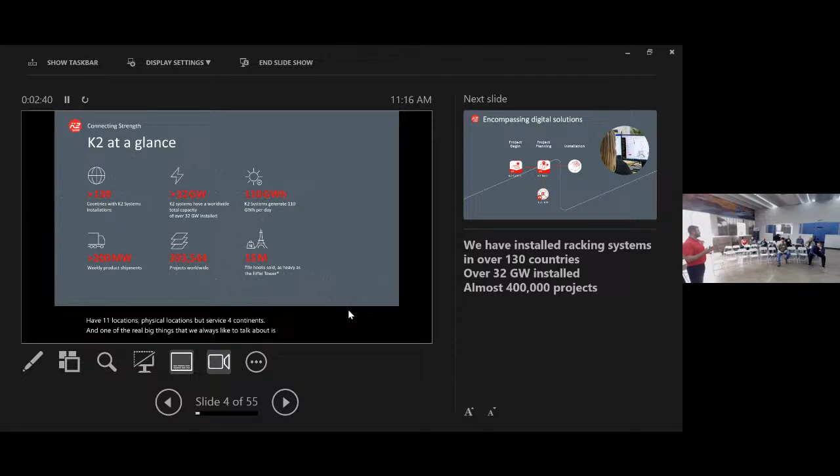One of the things we like to highlight with K2 Systems is that we are a global manufacturer. We currently have 11 physical locations, but service 4 continents. One of the big things we like to talk about is we actively provide material to 130 countries and have just under 400,000 projects worldwide.

One of the really great tools we offer is a design tool called K2 Quote and K2 Base. Those that start to use us will have access to this. These provide a bunch of engineering background and embedded service to it, a great tool to offer the installer community.

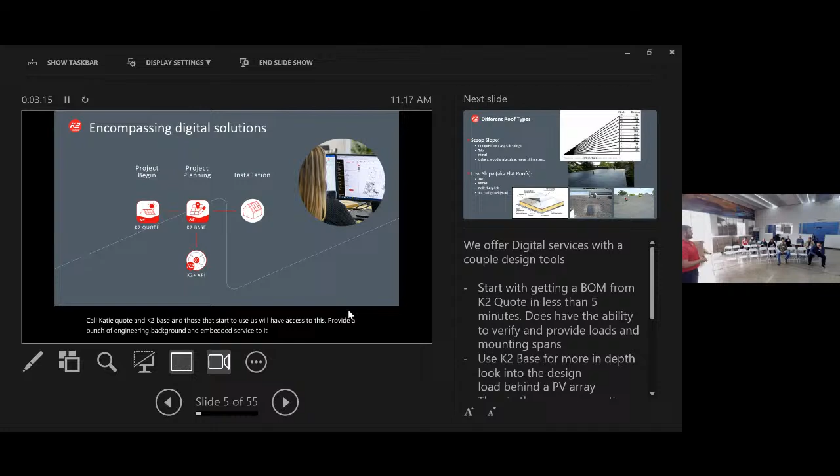All right, let's get into it. As was said, I've been an installer for 8 years before coming to K2, as a foreman on commercial crews, so I've seen a lot of the challenges we're going to talk about in today's presentation. We want to open the floor for you guys too, so ask what type of challenges you're seeing, and if any questions arise feel free to interrupt. We'll make this conversational.

What is a low slope roof or flat roof? We're going to focus on commercial flat roofs. I've been involved in some ground mounts as well, but today's focus is on the challenges in the flat roof space and solutions we can offer. A low slope, or flat roof, is anything below a 2:12 pitch. In roofing terms, 2:12 is 2 inches of rise over 12 inches of run, which ends up being a 9.5 degree tilt. So anything 9.5 degrees and lower is what we're focusing on today, and anything higher would be considered a pitched or steep slope roof.

Let's go through the evolution of racking, where it comes from. Some of the early adoption of solar in the 70s and 80s was all custom built frames, sometimes wood racking, heavy steel material, just unistrut available at the electrical supply house. There was no testing or certification involved, it was all custom.

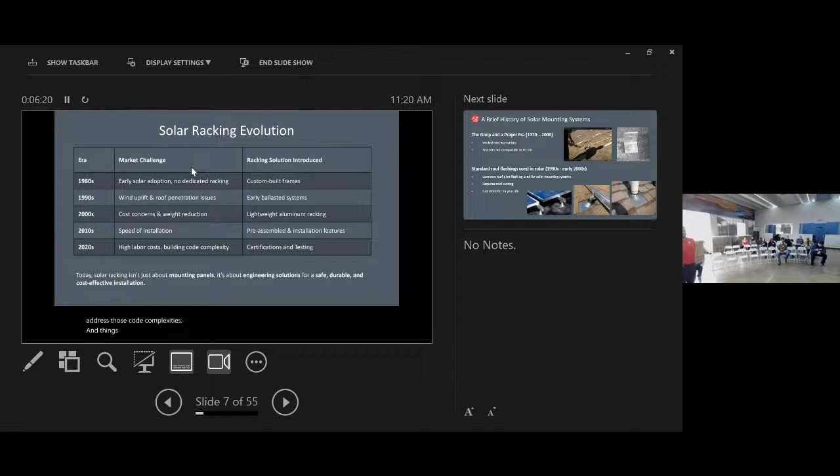So like I said in the beginning, it was all custom racking. We call it the 'Goop and a Prayer' era, where you can see in these images just wood blocks sealed to the roof with whatever caulking they had on site, not roofing-approved sealants, just whatever they had, and angle brackets attached directly down onto the rooftop with some sealant on top.

Moving forward, now we have some code around flashings in the IBC and the IRC. So installers are starting to use metal flashings, but still no real solar-specific design components. They were just using roof boots, whatever you'd use on site for drainage pipes or vent pipes. Good enough.

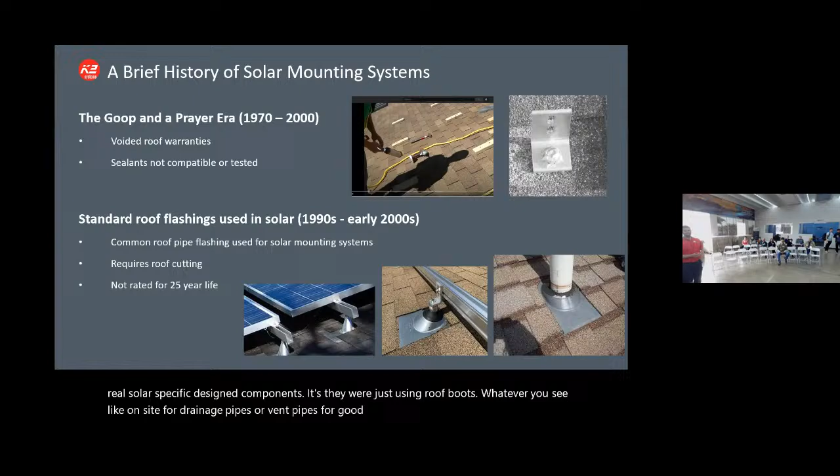Continuing forward, now we're in the early 2000s, 2010s. Now we actually do have solar-specific flashings, not just using the OD flashing you'd see for roof vents. These are now addressing building code compliance, and AHJs and finance companies are starting to deny anything that's not using these solar-specific components.

Then moving forward into the 2020s, we have direct-to-deck options, rafter options using what we like to call flexible flashing. So no more reliance on the metal flashings. It's no more prying up of shingles, which eliminates a lot of that user error and installation error, and really keeps the integrity of the roof intact versus having to pry up tar strips of shingles.

And now we're seeing butyl-based designs with pre-assembled butyl bottoms and similar approaches.

We sell and provide hardware in most of our components. This one will come kitted with a number 14 screw. We decided to go with the number 14 screws as our primary option, but we do offer lag bolts as well, so if you still want to do the pre-drilled pilot hole with the 5/16 lag bolts, that's fine too.

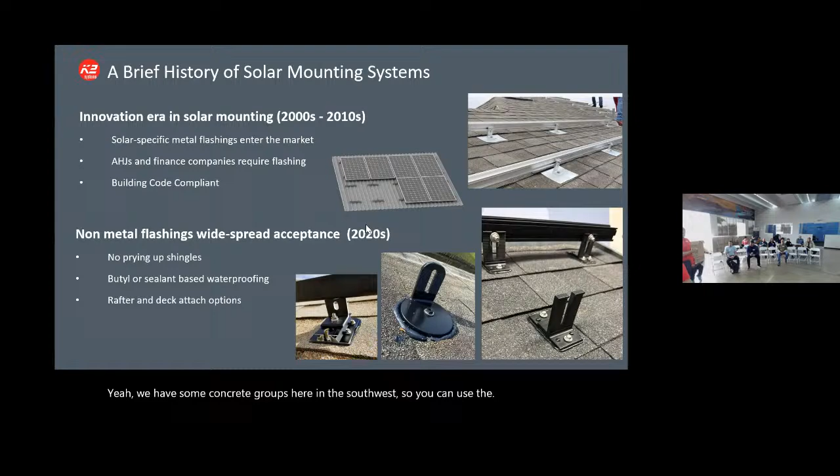Okay, yeah, and this is what we just talked about. So one of the things that we did is decided to go back and use a butyl product that is UL 2703 compliant. UL 2703 being, you know, mounting and clamping systems for solar PV, and this variant of that addresses waterproofing and runs through various testing and is now UL 2703 compliant. We also have an ICC report on this butyl as well. So if you're not familiar, the International Code Council is the one writing the IBC, the IRC, which originally had in these different codes that metal flashings were the compliant way to deal with rooftop waterproofing. So ICC is now recognizing flexible flashing as a compliant option.

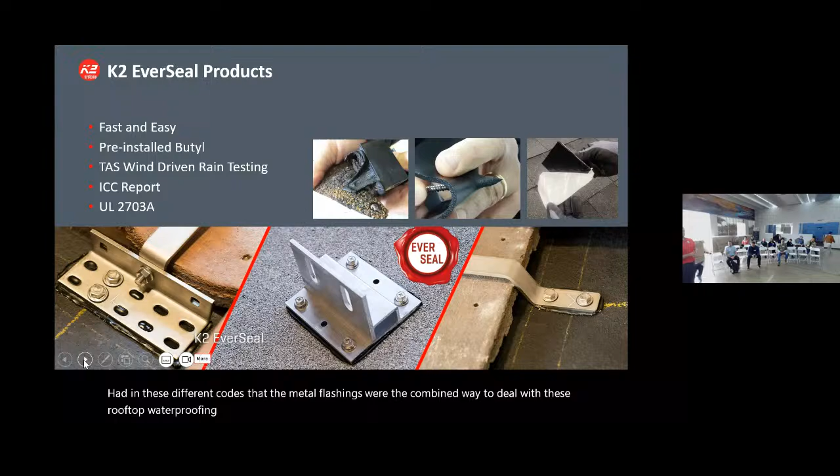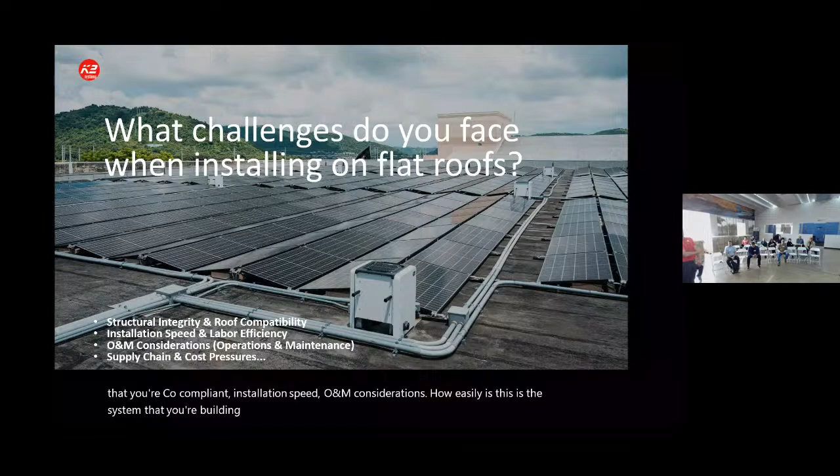So some of the challenges that we see with racking and logistics are structural integrity, roof compatibility, finding the right products, making sure that you're code compliant, installation speed, O&M considerations, how easily a system you're building is maintainable, and supply chain and cost pressures, right? Having universal components, less amount of materials in-house, but still being able to find the right solution.

So we wanted to ask you guys in the crowd here, what challenges are you guys seeing in this flat roof space?

The typical one would be like obstructions, maximizing either the power density or just building around different roof obstructions and the space that you have to work with. And if somebody's on a flat roof, there's going to be a lot of big HVAC systems or piping systems on the rooftop that you have to work around. Another one, with those large systems on the rooftops, is the load that you can actually put on these roofs. How much PSF can the rooftop take? Point load as well. But structurally, if that's capable or not.

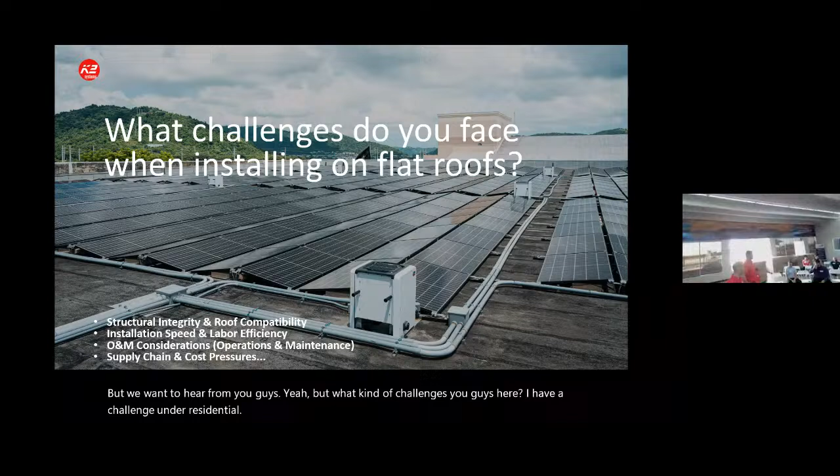Okay, yeah, so there's a couple different systems. You could use a ballasted system and get beneath 8 pounds per square foot for sure. Sometimes it's a little bit tricky depending on the region, the wind load you're seeing. But also, we'll talk about this a little bit, there's a mechanically attached system where you're actually fastening into the roof structure through the foam too, even in some cases. So we're probably talking about mechanically attached if we're talking about foam on top that you're worried about.

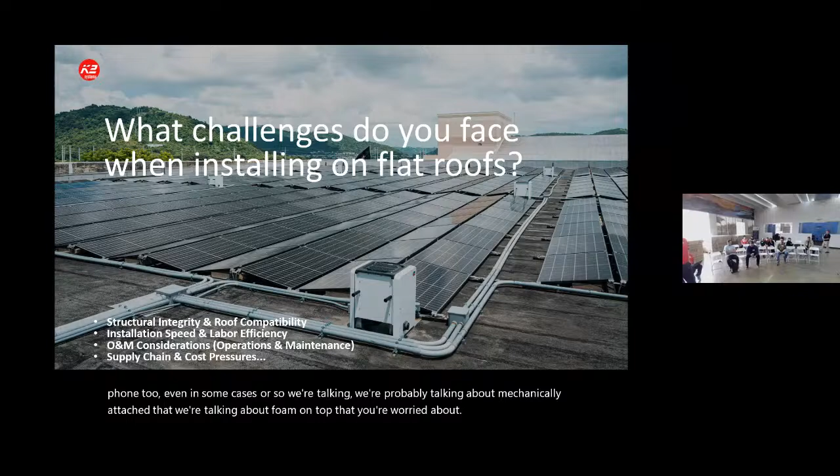Like we're doing our pound per square foot, we want to know how many ballast blocks, how it's distributed. Typically you can get beneath that 8, even with a ballasted system, with our ballast-based system that we'll talk about. But the other option is always to go with a mechanically attached system and tilt it up, because on a flat roof you could go flush mount, but you'd want to tilt that up.

You guys are using the kind of install customers are asking specifically to put on the roof, right? Yeah. That's a challenge with that, staying underneath that 8 pounds per square foot.

Yeah, I think that should be doable, right? It's even 5 or so. Difficult, yeah, but on average it'll be between 5 and 7, so we can get beneath that 8. We can talk about it and figure out a couple of applications.

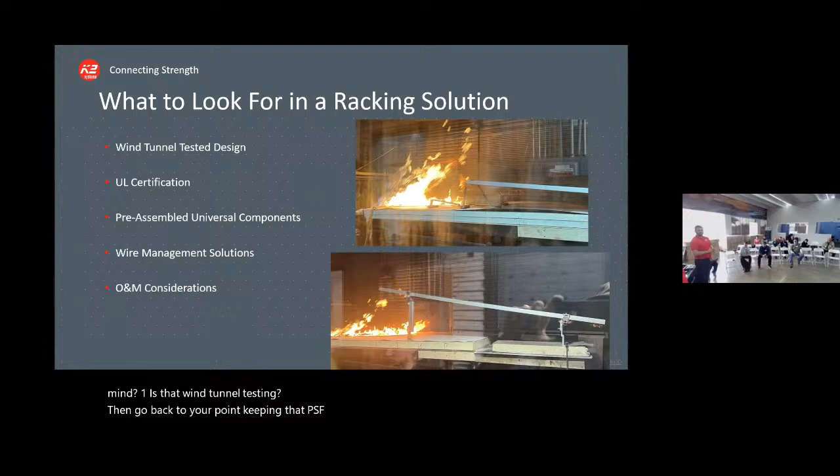So what are we looking for in a racking solution? What are the things to keep in mind? One is wind tunnel testing. Again, going back to keeping that PSF down, is your system optimized for wind tunnel testing so you don't need a certain amount of ballast blocks on the roof that would bring you over that 8 pounds?

UL certification is another one. Here are a couple of images of some of the testing you go through with UL certifications, UL 2703 specifically. Basically throwing flames at the roof, you simulate a rooftop and put your racking system on there, and see does the racking system contribute in any way to the spread of that flame. That's basically what they're going for, and happy to say that ours does not.

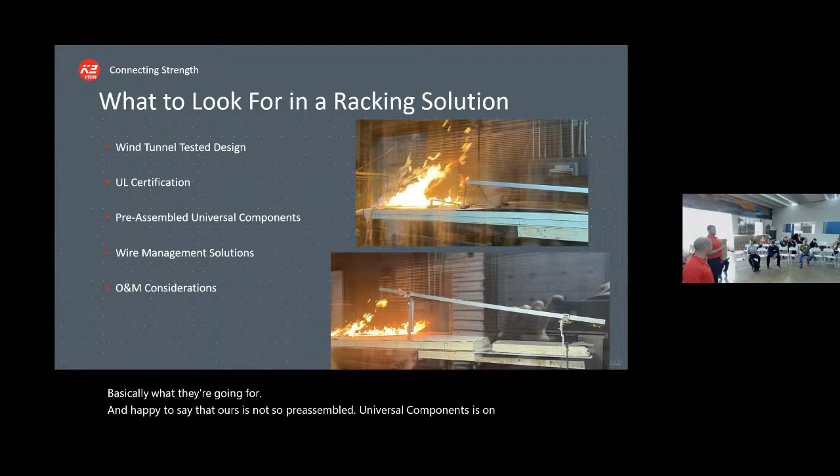Pre-assembled universal components help on the installation, labor side, and cost. And then wire management solutions - we're talking solar here, so there's going to be electricity, PV wire, module leads, optimizer and microinverter leads that you have to deal with. You don't want those things getting damaged or dangling on the roof. You want a certain height off the rooftop for heat concerns, and then O&M considerations - how easy can you maintain the system?

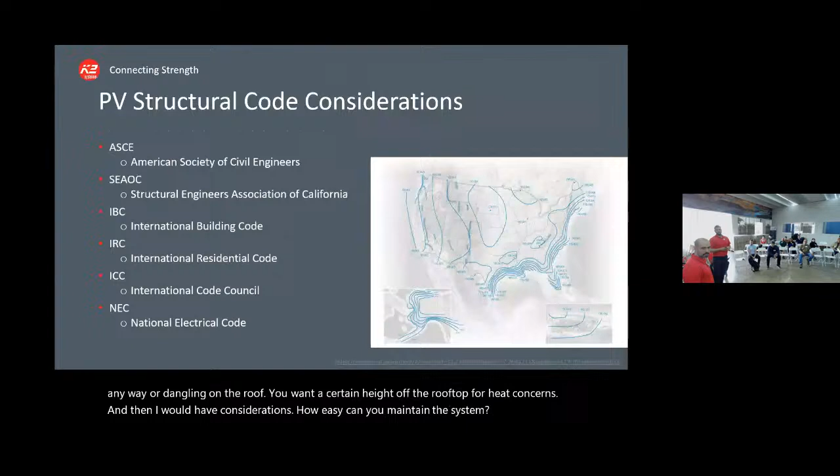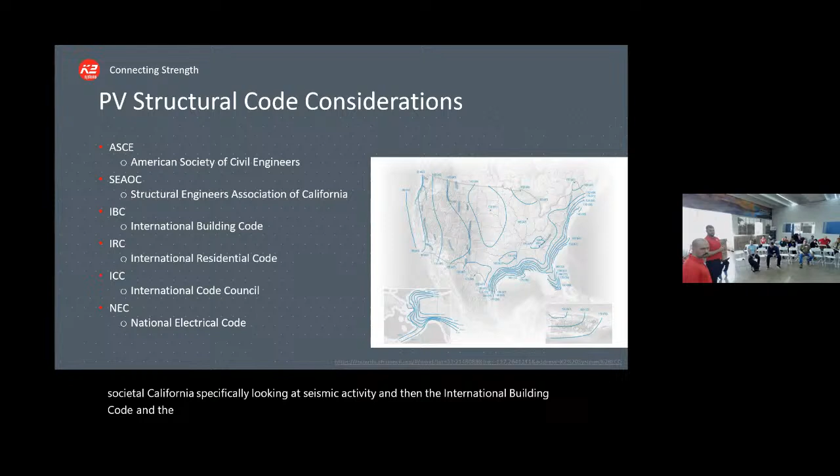There's some structural code to keep in mind when designing a system and choosing a racking partner. The American Society of Civil Engineers, ASCE 7 in particular - their section addresses wind and snow loads, seismic loads. SEAOC, Structural Engineers Association of California, specifically looks at seismic activity. Then the International Building Code and International Residential Code address flashing concerns on rooftops, written by the ICC, and then the National Electrical Code, specifically 690, the PV systems code, looking at rapid shutdown.

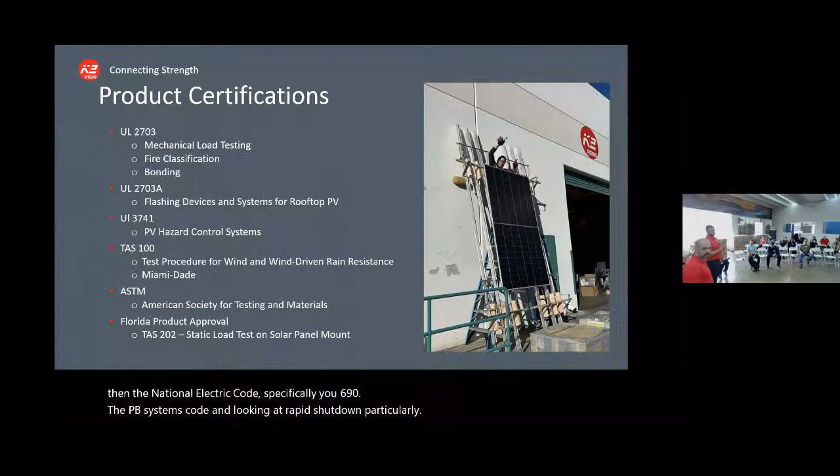Product certifications are another thing to find in a racking partner - UL 2703. Are they certified to one or two of these classifications - mechanical, fire, bonding - or fully listed to the UL 2703 listing? 2703A, like we talked about earlier, covers flashing devices and waterproofing. 3741 is a newer standard - it's been around a few years now, but addresses PV hazard control systems for first responders and firefighters getting on the rooftop, making those systems safe for them.

And then waterproofing again - TAS 100, wind, and rain. And the material you're using - American Society for Testing and Materials, ASTM - making sure all the aluminum and steel going up there is quality. Then there are more regional certifications like the Florida Product Approval and Miami-Dade approval, which have kind of become a standard. Is your system going to withstand some of those high hurricane zone wind pressures?

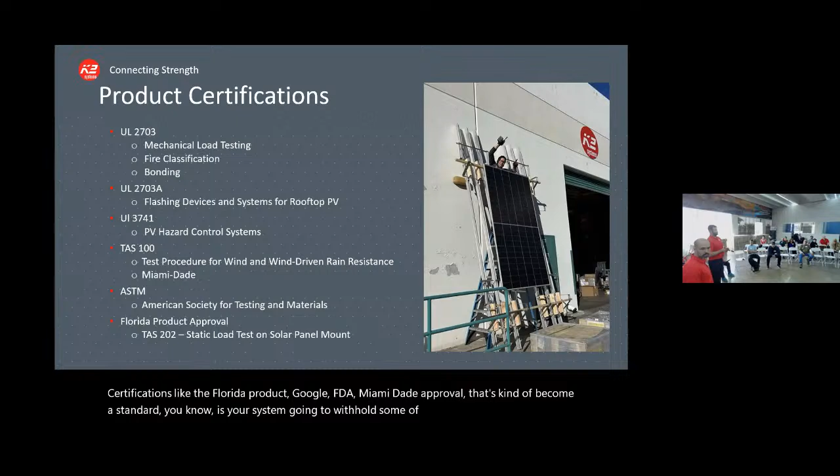So here's what we talked about earlier with that concern about PSF - you can go with, in general, two types of flat roof systems: ballasted system or mechanically attached.

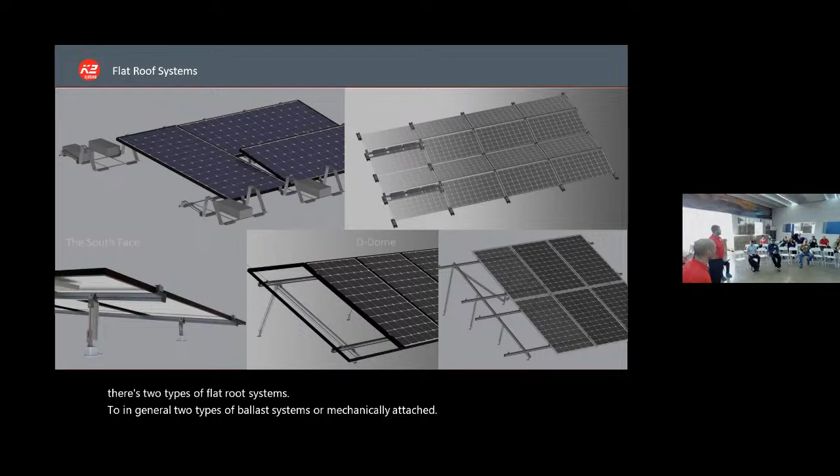Really, it depends on a couple factors. We can design it to whatever we're going to see in the US. Even down in Florida, we could potentially design it to that 170 we're seeing down in Miami, though I don't know if they allow ballasted systems in that county. There's a couple different ways to address that - you fill up the chassis with 5-6 blocks, or we could do a hybrid system with attachments mixed in with the ballasting so you can limit the PSF on the roof load. There's typically an anchor bracket attached to the chassis, and then the roof anchor that attaches to the structure.

So there's a couple of ways to do it, but yeah, we could design a system that would meet all of that. Some of the cities are pushing 110 miles now. Yeah, no problem, for sure. And we would be at a low PSF at that one.

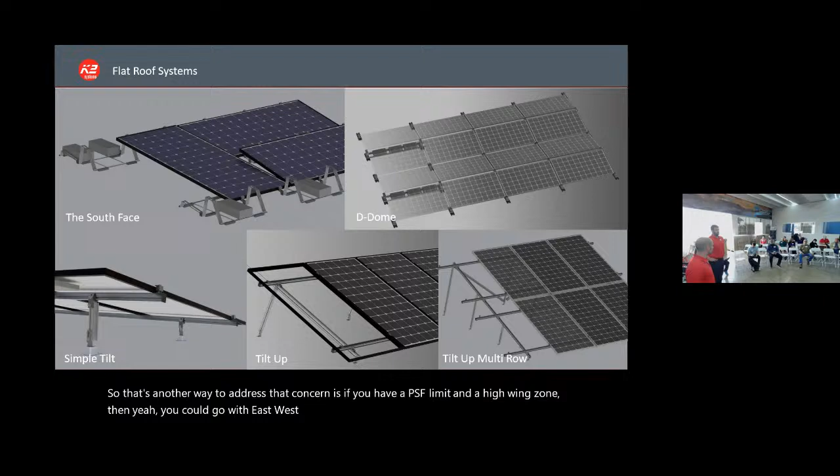With an east-west facing system, it's more like a wave on the roof - there's no high end, it's one continuous system with no inter-row spacing. So that's another way to address that concern - if you have a PSF limit in a high wind zone, going with east-west, the production is going to be a little bit different. Those are more optimized for a time-of-use situation where you're getting higher rates in the morning and evening on your electrical bill, which pulls in more power. In the morning and then in the afternoon when people are coming home from work, the power from your system is going to be higher versus a south system.

We'll talk about some of our mechanically attached systems as well. This is just a standard tilt-up system pre-engineered for - I think it's actually up to 35 degrees now. This is a little older, so pre-prescriptive engineering, and we could go higher, it might just require wet stamping. But in this region, a 20-25 degree tilt is going to be sufficient for the power you guys are going to want to see or produce from your system.

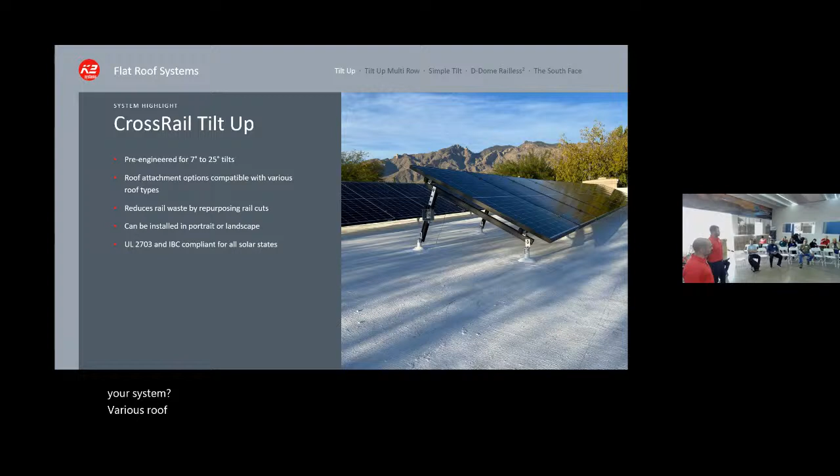Various roof attachments are available for these types of systems to address the different roof coverings - TPO, foam roofs, modified bitumen, and EPDM. There are solutions that'll cover all of those different roof types.

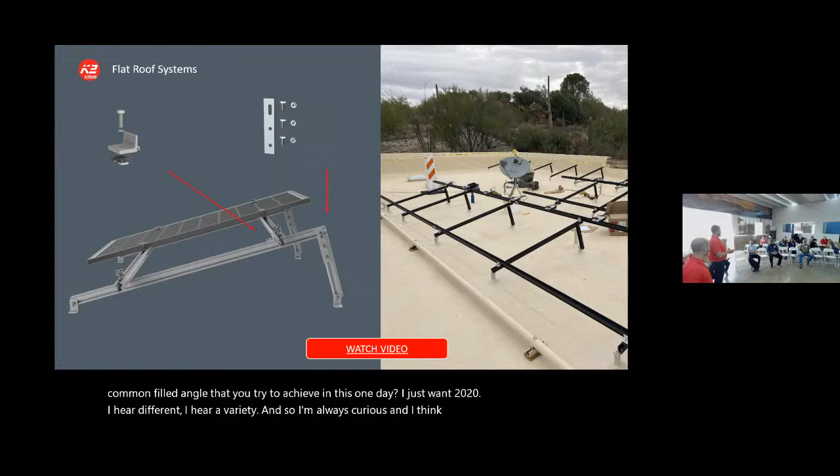Another question for the crowd - what is the most common tilt angle that you try to achieve? I hear a variety, so I'm always curious, and I think finance plays a little bit of a role in that requirement.

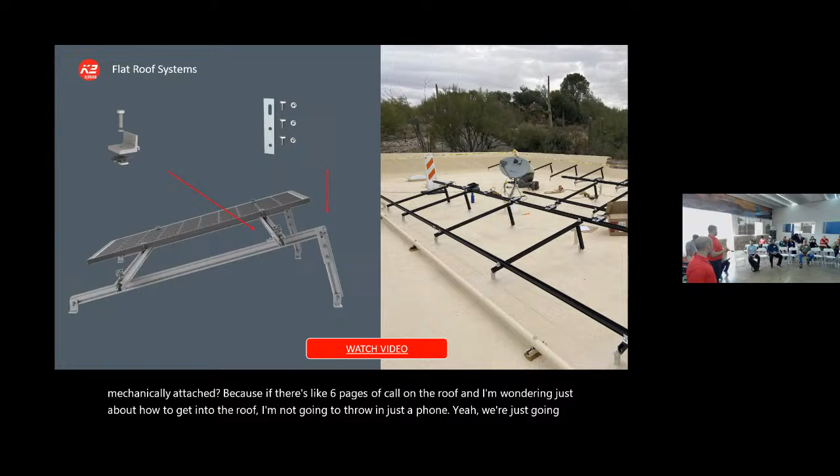So off that question - if you're going with the optimal angle, a 20-degree angle, what are some of the reasons you guys would install a ballasted system that's typically limited to 10 degrees versus mechanically attached? There was like 6 inches of something installed on the roof - I'm not gonna drill through 6, 8 inches of that, so we're gonna move to ballasted. So you're just willing to sacrifice some of that production you can get. And I think typically on a ballasted system, the inter-row spacing is gonna be less too, so maybe you can fit more rows, which factors into it.

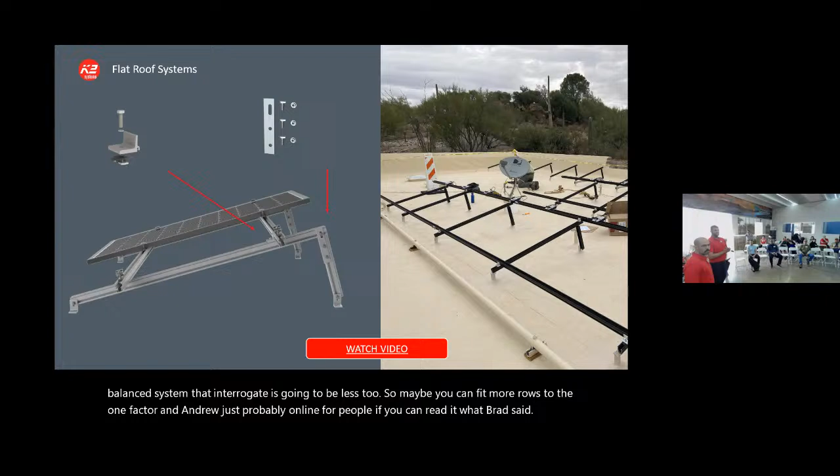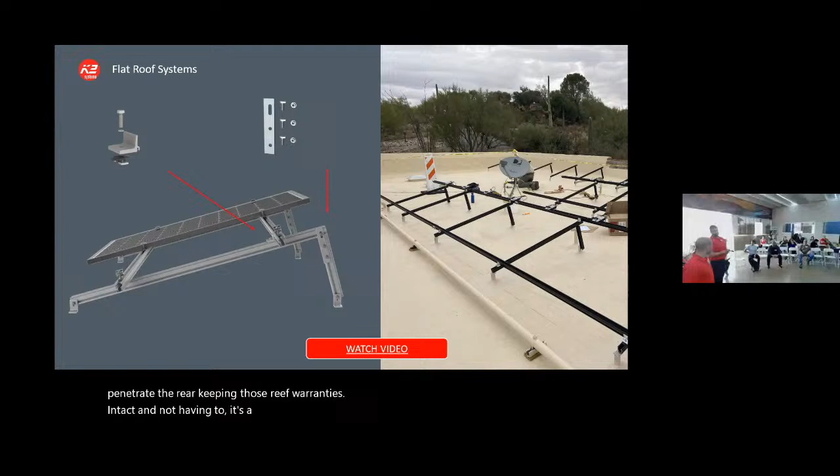For people online, if you can reiterate what Brad said - I was asking why you might sacrifice some of the production, going from the 20 degree angle down to a ballasted system. The typical answer would be, if there's concern about not wanting to penetrate the roof, keeping those roof warranties intact, and not having to deal with the pain, especially if it's a 4-day home trying to find something to drill into. You end up having to cut a little bit of the roof up to try to find something solid.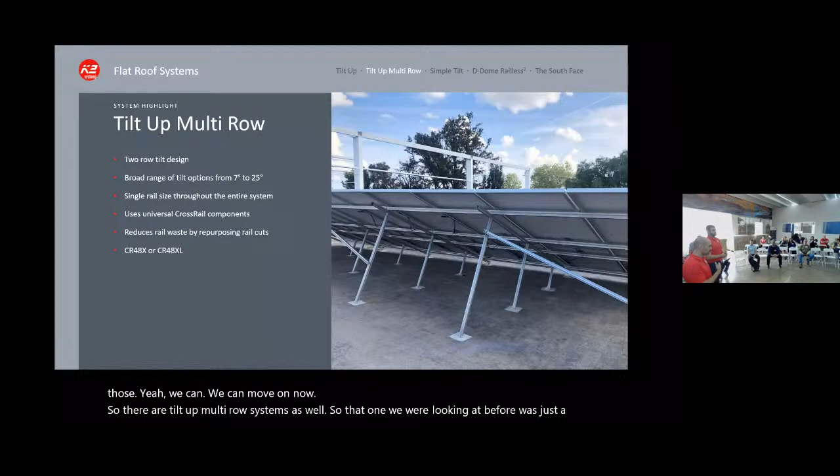So there are tilt-up multi-row systems as well. The one we were looking at before was just a single row of modules, so you're going to have inter-row spacing between each of those single rows. This is more of a niche system that takes a little bit of custom engineering, but what it allows you to do is fit 2 rows of modules within a small space. So if you have a lot of constraints or a small rooftop to deal with, and you can't get those 2 or 3 rows of modules because you don't want the shading loss between rows where you're dealing with specific spacing that you need between rows, then you can go with a multi-row system and add 2 rows of modules on one racking system.

It's going to be for smaller spaces. We actually had a customer installing those multi-rows down here. What was the reason? The space. Limited rooftop space, they needed a certain production, so getting that second row allowed them to get what they needed. And the panels went from portrait to landscape, which they loved.

So this is more of a custom system, so we could do landscape rows as well. If you wanted to get maybe 3 or 4 rows of landscape, getting outside... this is also prescriptive, or we can design this up to 25, but 20 would be ideal for this region.

And going back to the ease of installation and universal components, the K2 Crossrail system, we use this for our residential systems, has integrated wire management. You can see on the table here and on the example over there, we designed our systems, our tilt-up systems, to utilize the same exact rail on a flush. So all of the stanchions, all of the posts are utilizing small cuts of that same crossrail. You can see it on the simple tilt system over there.

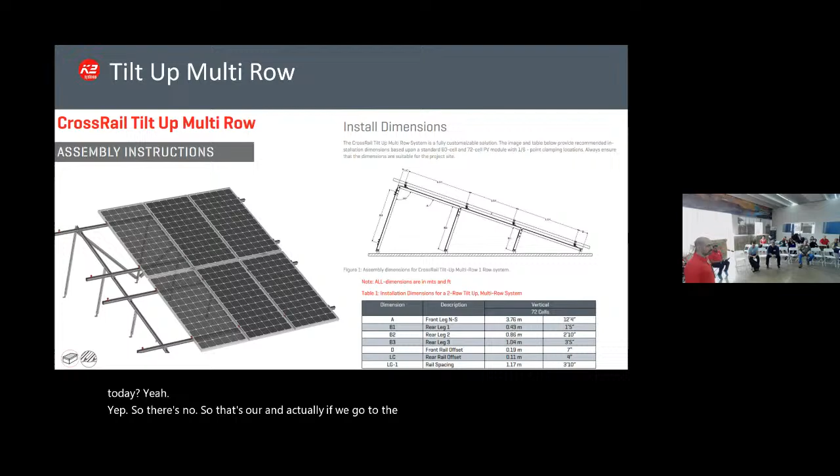That's our simple tilt system. So on the crossrail tilt-up and the tilt-up multi-row, because they're designed in multiple rows, there's going to be more bracing and more crossrail involved. Typically you have a north-south brace and an east-west brace. Our simple tilt system is designed for just having a single cut to make on that, so it uses 25% less hardware, less materials, less rail materials, quicker installation, lower labor costs—it's just a simpler install. So the simple knee is the heart of this system.

This is a new... our tilt-up system is an incredibly strong structure because, to Drew's point, you use the north-south and east-west for stabilization. But what we found from the installer community feedback was it was a lot of material, a lot of cutting. Because we're using our rail, we don't pre-engineer our legs or the braces because different module lengths and different degree angles that you want to achieve give you flexibility, but you've got to do it on an individual case basis—unless you have 10 cookie-cutter jobs that are all going to be the same.

So one of the benefits of moving into this—I always call it our 2.0, but it's our simple tilt—is the fact that you don't require all those cuts and pieces, you just need a single cut. You can see even back here, which is a back leg for your angle, and that's all predetermined in the installation guide. So if you want a 20-degree tilt, we predetermine it's a 17-inch back leg.

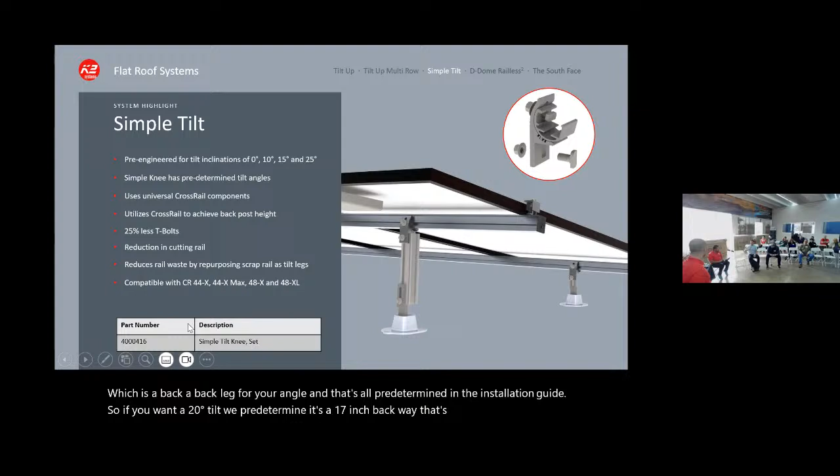That's why I asked if we cross over—there's no rail on this one. Correct, for that, exactly. Yeah, so that's going to remove less material, easy installation, and you're still going to get good engineering, good standard out of it. So it's going to be, like I said... Short answer is no. But there's the tilt-up system.

There is one benefit to it: since you don't have your north-south leg for stabilization, if it gets real rigid, you can stagger your front and back leg. That will give you a little bit more flexibility there.

So short answer, no, but the other side of the equation is you don't necessarily need that. I hate to say it, but it seems like, well, why would I leave this system? But you're still going to get good standards.

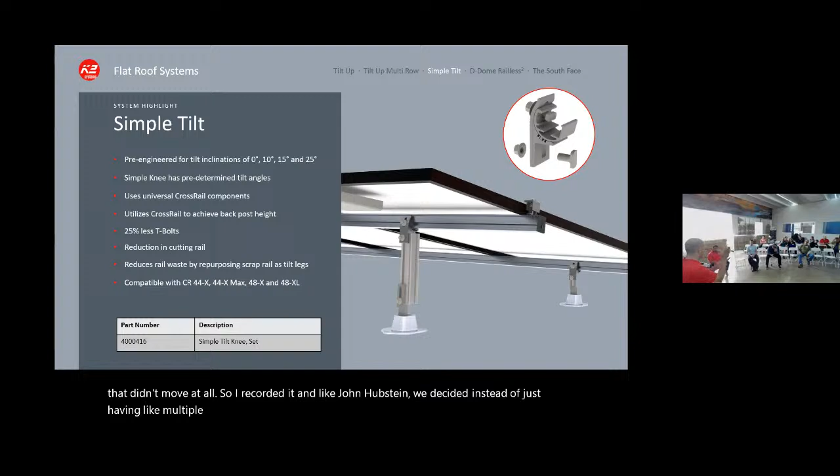Like John touched on, instead of having multiple part numbers and SKUs for the different tilt legs you'd need depending on whether you want 20, 30, or 10 degree tilt, we decided you can use our crossrail, and it's flexible in that we can do whatever you want. But if you have a quick fitter and a guy in the warehouse, you can just cut a bunch of those up, ready to go.

Regionally, you're going to know what you need — say 20 degrees in Phoenix, 10 degrees down in Tucson — so you can pre-cut them. It becomes cost effective as well, since you're cutting sticks of rail rather than predetermined back legs. When you're going 4 or 5 rows of modules across, you're going to have a certain amount of scrap rail you're cutting off anyway, whether that's 10 inches or 15 inches, so you can use those scrap cuts for your post.

But we didn't abandon the old system. We still make it available because you have installers that absolutely prefer it.

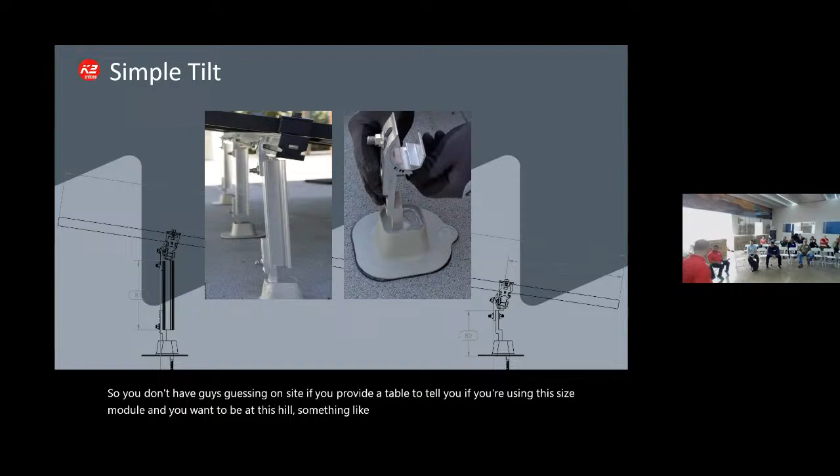That simple knee has notches in it. The base has 4 notches, and the top piece that holds the rail has a tab that slots into the notches for your predetermined tilt angle. So you don't have guys guessing on site. We provide tables that tell you if you're using this size module and want this tilt, cut the leg to this length. You just set your tilt angle within this piece — 0, 10, 15, 25 — and it's all predetermined, so it takes a lot of calculation off the site.

One of the bigger pieces of feedback we've gotten from the field is about the leg being predetermined in the front and back. Before, you'd have one person in the back holding it up and one in the front, getting it perfectly level on the rail, then tighten it. So we wanted to remove that step.

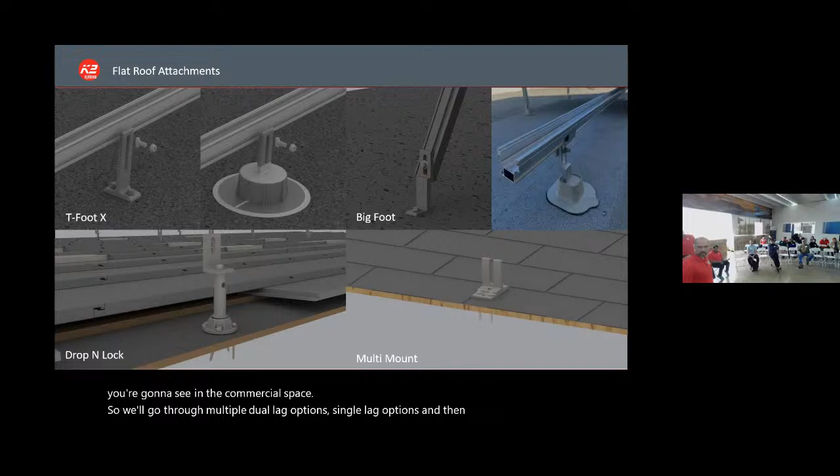Now we're moving into some roof attachments to address the different roof coverings you'll see in the commercial space. We'll go through multiple lag and dual lag options, single lag options, and some number 14 screws. We'll also address the old style of sealing these roof penetrations versus a newer process we created called VP Armor.

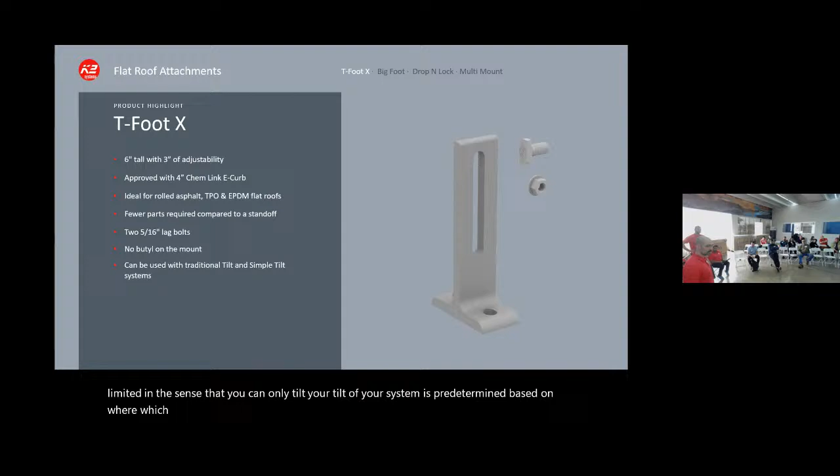So this is our T-foot X. This is right in line with that cross-rail open system — really robust, with 2 lags into a rafter, so you're going to get great pull-out strength from it. But it's limited in the sense that your tilt and your system orientation are predetermined based on which way your rafter runs, because that slot on the T-foot has to face a certain way.

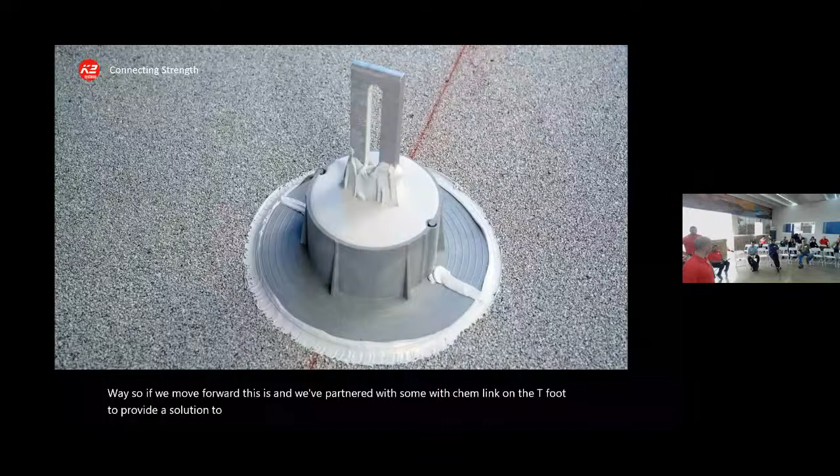Moving forward, we've partnered with ChemLink on the T-foot to provide a waterproofing solution. Is this a typical solution you guys use out here? Does everybody use this ChemLink? Yeah, that's why we figured on that.

So moving forward, we went from the T-foot to now what we call Bigfoot. It's a single leg option, so now you can rotate it 360 degrees. You don't have to worry about the rafter orientation on the rooftop.

So you can tilt it due south the way you want it. And we've paired this — we partnered with Sealbond, who's been in the roofing waterproofing space for decades, to package their Sealbond 490 material in with our Bigfoot Kit with Armor. So this Armor is now a one-piece design.

Those ChemLink products are not only high cost, but painful to install — it's a multi-step process. You're having to use part 1, the pourable sealant, the coffee tube, the M1 on the bottom side. We eliminated that and made the armor into a one-piece design that has butyl on the bottom, so now you just peel and stick that butyl down on the rooftop.

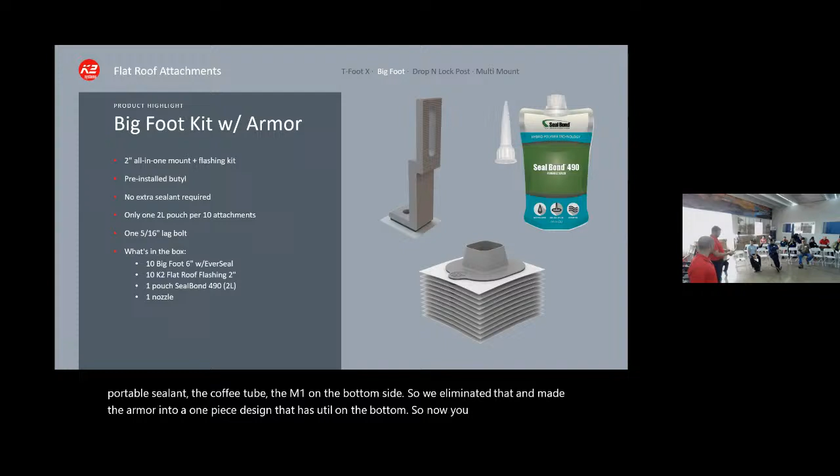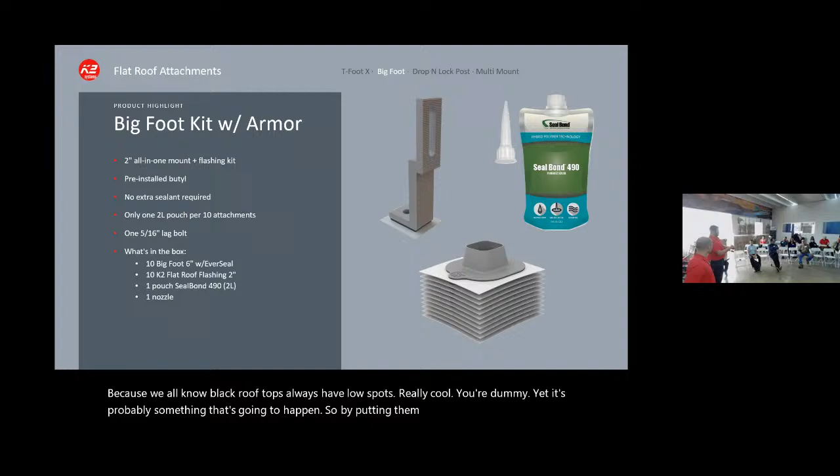Pre-install, butyl is hydrophobic, so water cannot get through it. When we partnered with them, from an engineering perspective, we wanted to come up with a solution that improved the install rate. We all know flat rooftops always have low spots, and leaks are probably going to happen. So by putting a pre-installed butyl where the penetration is going to go, it's going to seal that penetration.

Then we put a second line of defense — going to Drew's point, did you install it right? If not, you might do it differently than I do, differently than he does. Peel and stick is always the same way every time. So now you've got the second layer of defense, the hydrophobic butyl around it, and then the third will be the Sealbond before the attachment.

On the low end too, it's rated down to negative 40. You can install it — we don't necessarily want you to, that's not the ideal stable temperature, but you can work with it.

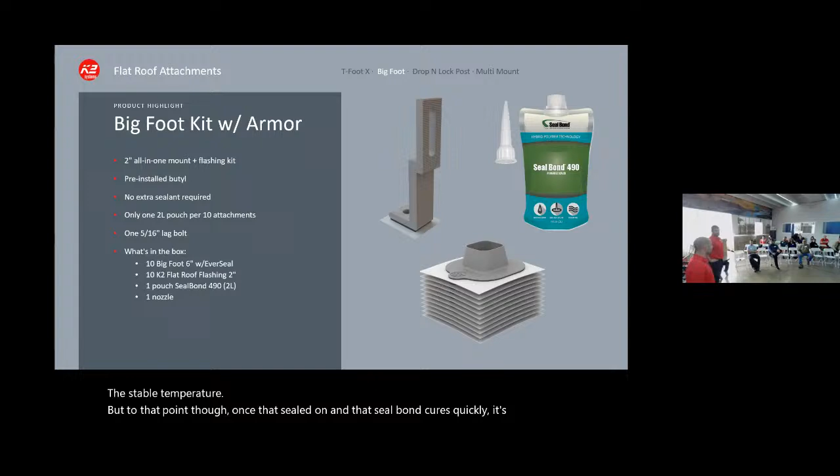Once that Sealbond cures — and it cures quickly, it'll skin over in minutes, though that doesn't mean it's fully cured through, that takes maybe 48 hours — once it's fully cured, the ring of butyl around the armor is really just working to hold that in until the Sealbond becomes the primary waterproofing.

Even if it's not going to fail, our proprietary butyl has been tested and has been around for decades. We haven't seen any issues with it so far. But once that Sealbond is cured, that's going to be the primary waterproofing — even if the butyl did fail, not that it's going to, the Sealbond covers it.

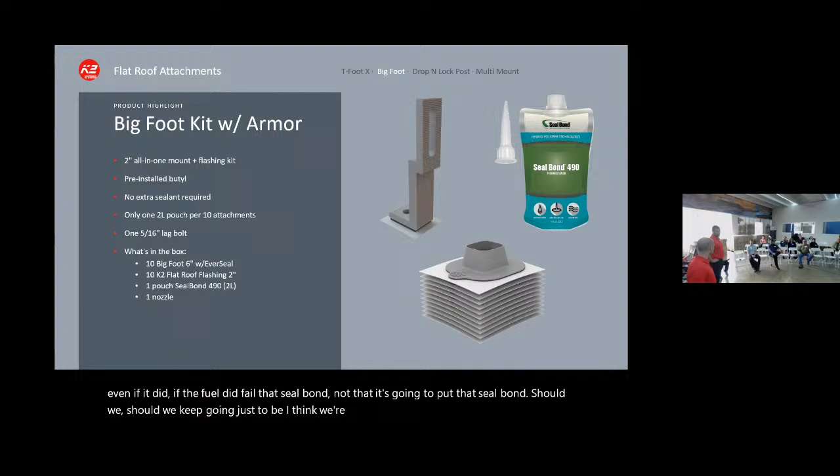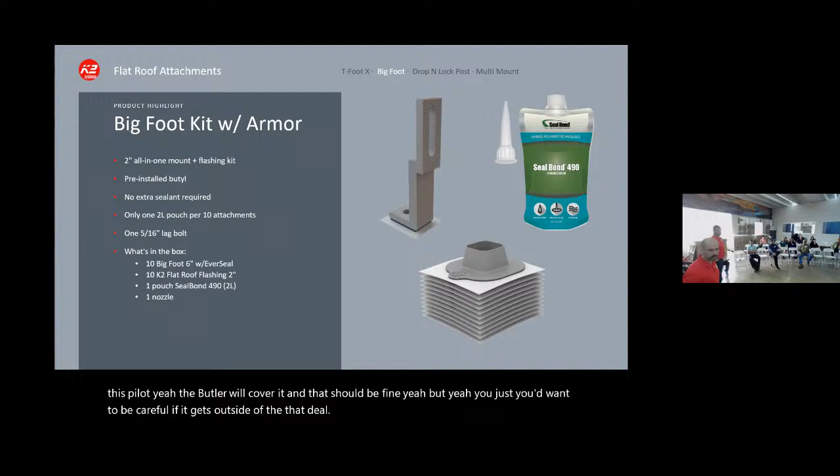Compatible with all the major roof types. You're going to see roof coverings like TPO, rolled asphalt, EPDM, even concrete.

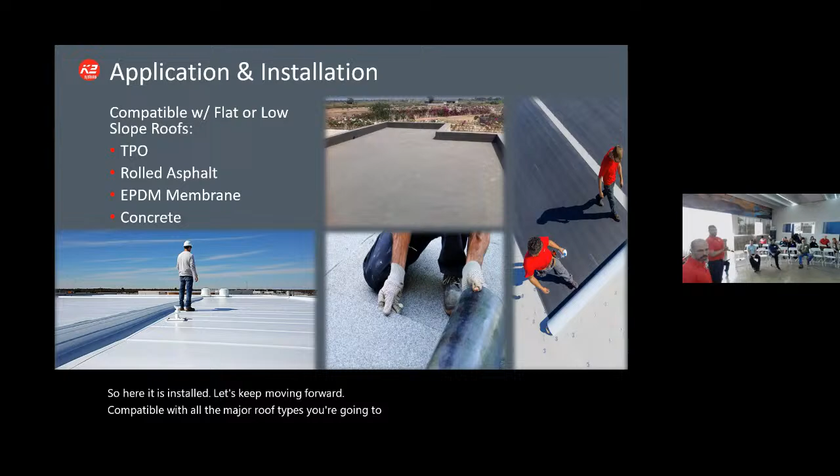Like we said, really quick installation. Single lag bolt, pre-drill, put your Bigfoot in, and then it's a one-piece design, peel and stick over top of the Bigfoot and fill it up. No orientation needed.

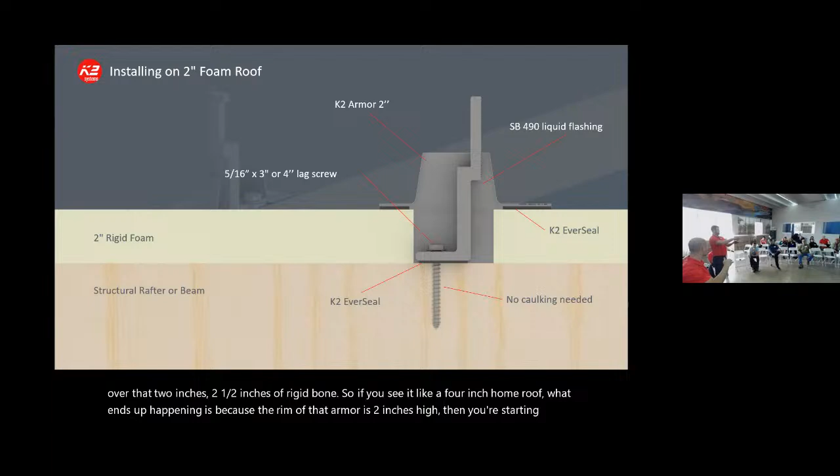So that's the typical installation. This would be the atypical installation where you're coring through foam. This is not compatible with anything over 2 inches, 2.5 inches of rigid foam. If you see like a 4-inch foam roof, what ends up happening is because the rim of that armor is 2 inches high, you're starting to bury back the top side of it and you're losing that T-bolt slot. But up to 2 inches of rigid foam, we're still good.

And warranty comes in the box, right? So this is actually with us and through Seal Bond - you scan this QR code, give some product details, and have a warranty. I think it's 15 years, but then you can renew it after that 15 for another term. So like all of our systems, they're going to uphold that standard of a 25-year life of the system on the module side - they're all 25-year.

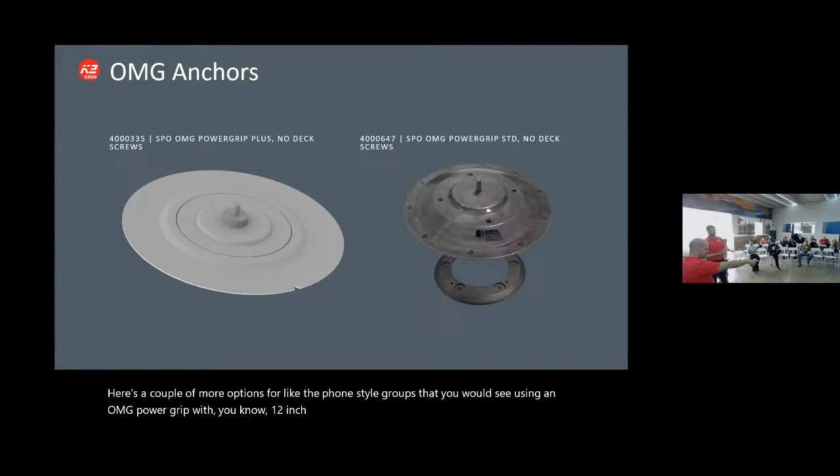There's a couple more options for foam style roofs - you'd use an OMG power grip with 12-inch long screws, like you see over there on the anchor bracket for the south face system. Just another option for low slope roofs.

Here's that D-dome system we talked about where it's east-west facing, so the wind tunnel testing is really good. This is good for roofing systems that have a really low PSF limit.

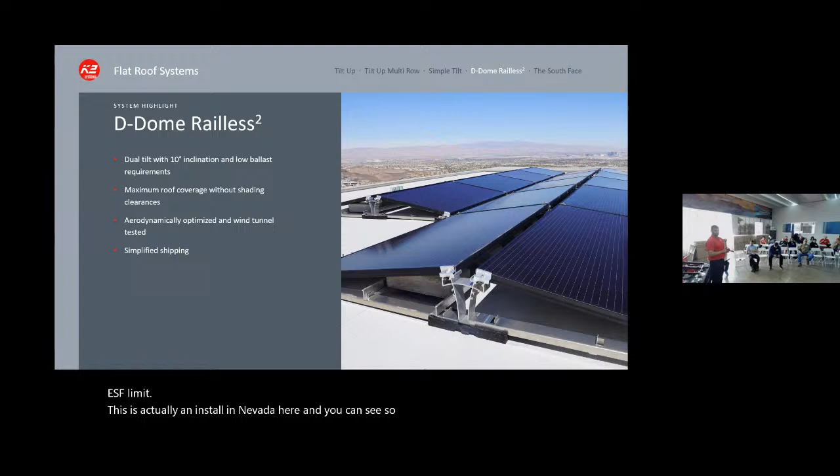This was actually an install in Nevada, and you can see there's one rack of ballast blocks, and these two modules act as a pair that share this loading. So the ballast required is basically split in half on these types of systems.

Looks really cool too when it's on the roof, like a big wave of modules. And then we'll get into our south face system here.

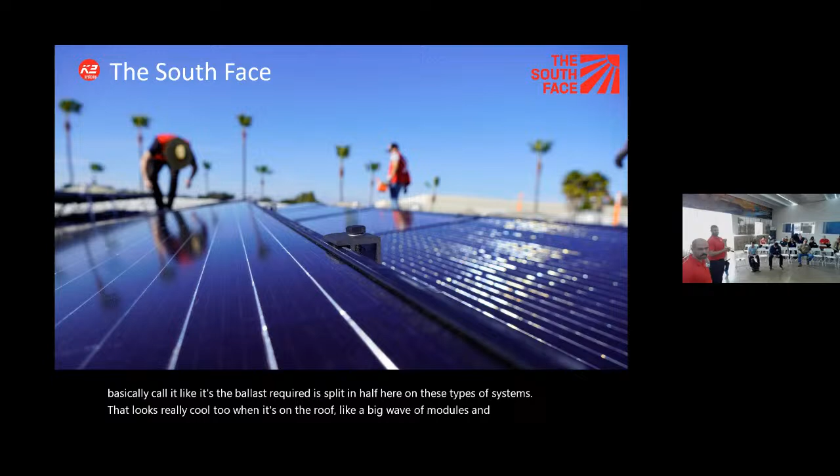There's 44 unique design configurations - this is the model. Design flexibility means simplicity; it's a real easy system to put together. It could be a 2-part system if you wanted. We have a south edge and north edge custom chassis as well, but really you could get the entire system done with just 2 SKUs, 2 part numbers. So simplicity, and then we added adjustability into it as well that we'll talk about.

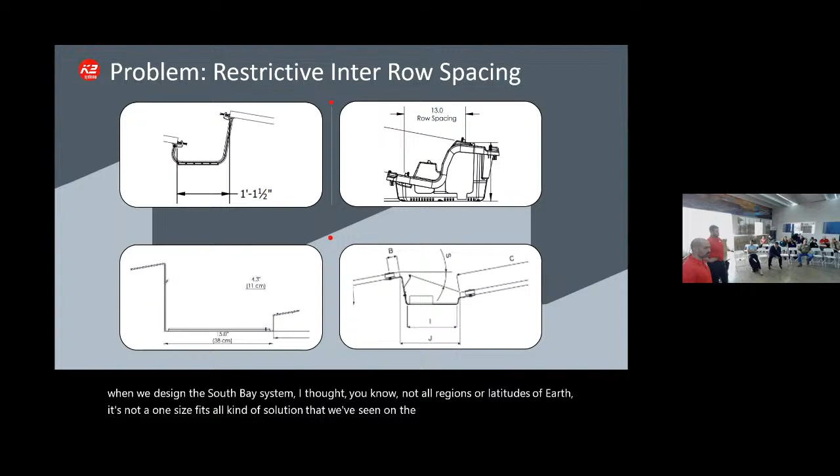One of the problems we've seen in the ballast space is restrictive inter-row spacing - fixed inter-row spacing. Meaning the space between the module rows. That's what we're talking about. Some of them are fixed at 13, 15, 18 inches. When we designed the south face system, we recognized not all regions or latitudes - it's not a one-size-fits-all solution like we've seen on the market. So we designed this south face to have 8 to 18 inches of adjustability in that inter-row spacing.

So it's optimized for regional design criteria - not just regionally, but what are the customer demands? Flexibility, having the design flexibility. Does the customer want as much module power density on the roof as possible? Do they want to cram those in there? Go to the 8-inch spacing. If the customer's more concerned not with the amount but with any shading loss they'll see in December, January, then you can bump that up to 15, 18 inches. So it's tailoring the design to the customer.

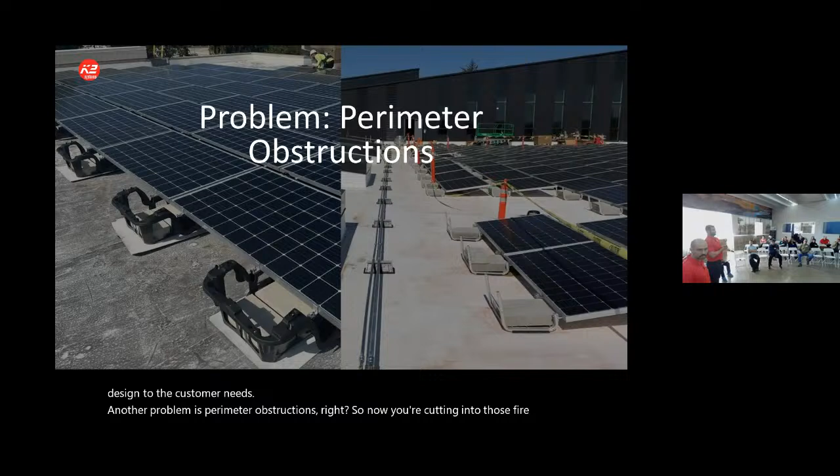Another problem is perimeter obstructions - now you're cutting into those fire setbacks you'll see on the roof. This has to deal with code compliance, and this is going to eliminate maybe a couple rows of modules you could see on the rooftop. If your racking is sticking out, you could be limiting the amount of modules you can get on the roof.

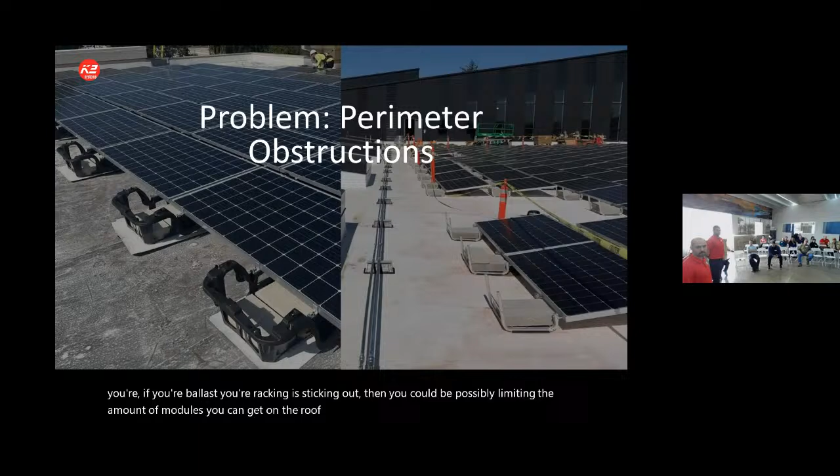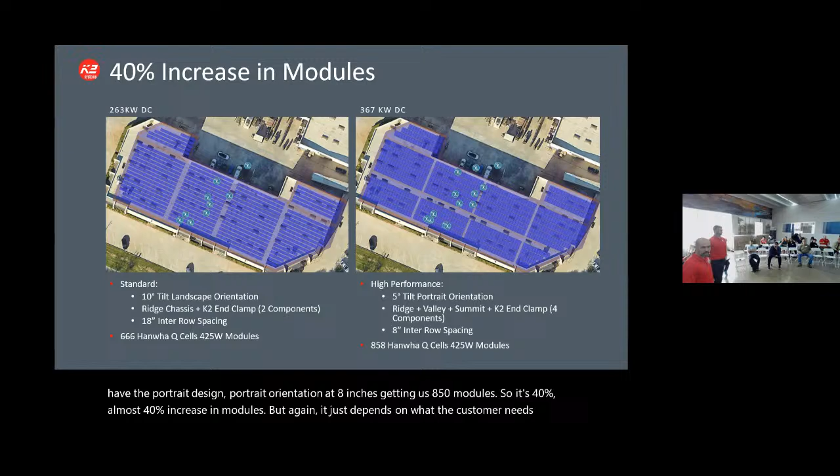We've run some Helioscope comparisons to highlight this as well, where we're getting 666 modules on the left side at that 18-inch inter-row spacing in landscape. Then we have the portrait design at 8 inches, getting us 850 modules. So it's almost a 40% increase in modules. But again, it just depends on what the customer needs are, right? It's flexibility—one system, they can do 2 different varieties of install.

Another thing with these ballasted low slope systems is multiple parts, a lot of different parts to put on it. I've been performing on these commercial crews for 3 years, and almost inevitably every time, I'd have a couple tables set up with 10 guys just assembling parts before they even get out to the rack. So that's something to keep in mind—the labor cost of guys having to assemble clamps and chassis to get them ready to even go out into the array. So we address this in the next slide.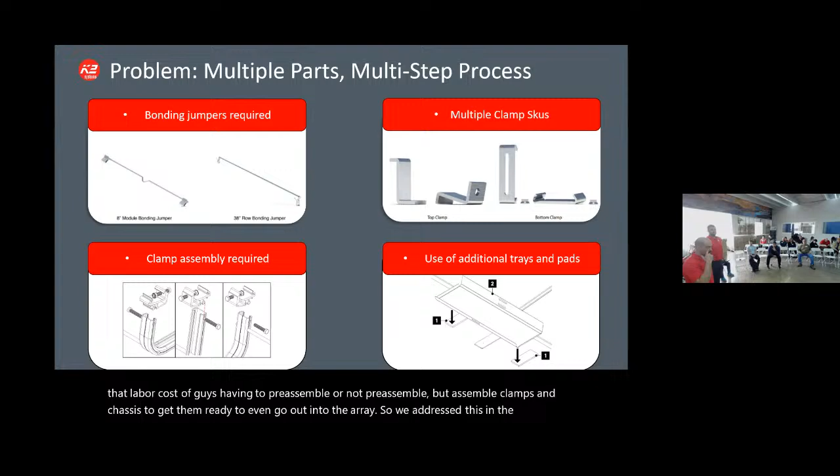The Southwest system, the next one, same thing—just way too many parts. So like I said, this is a 2-part system. You can use just the ridge chassis if you want, but you are going to have that sticking out on the south port. It's a 2-part system using the same cross clamp that we use, again going back to eliminating SKUs, eliminating part numbers, just creating efficiency in the logistics and design—just having one clamp that does it all.

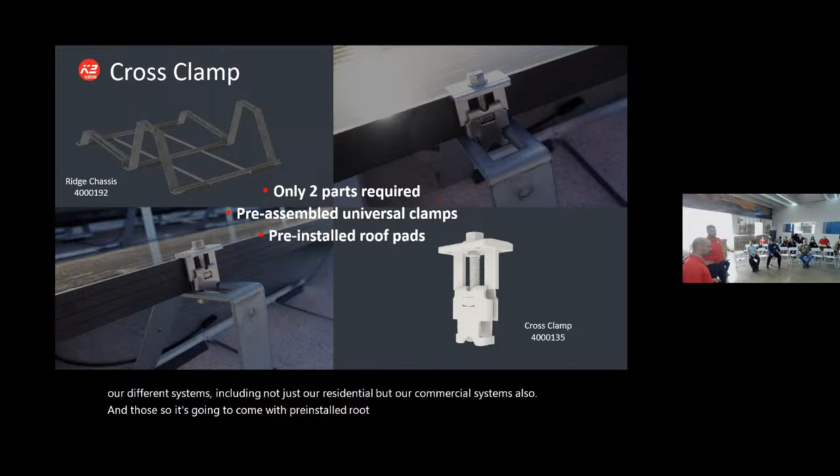So you can use this cross clamp on all our different systems, including not just the residential, but our commercial and ballast systems also. And it's going to come with pre-installed roof pads as well. So that's another worry on the challenger side—how are you going to address the potential to damage the rooftop?

We address that by adding these roof pads pre-installed on the chassis, so you don't have to put those on yourself. It's going to come palletized with those installed on it.

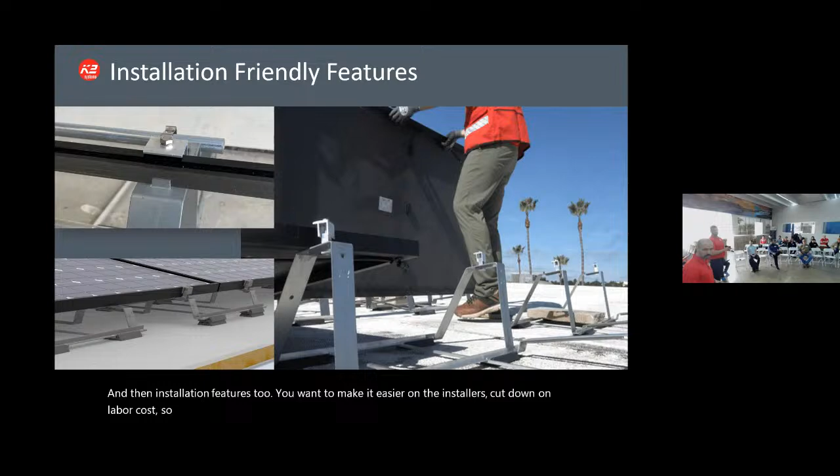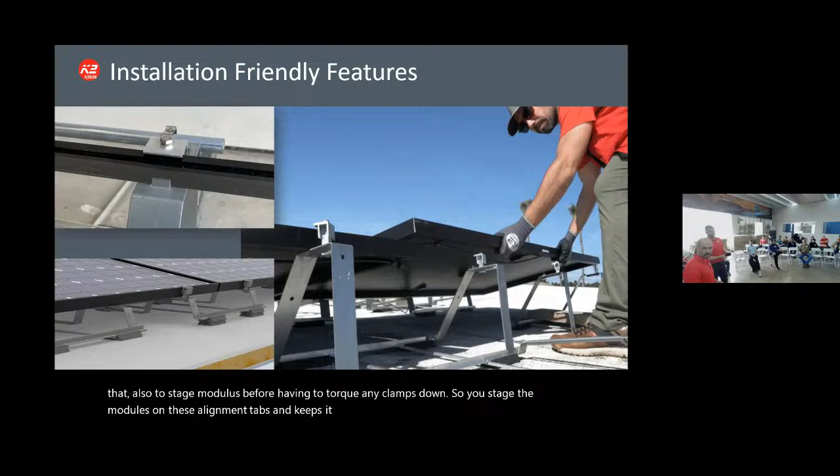Then there's installation features too—you want to make it easier on the installers and cut down on labor costs. So like I said, we have those pre-installed roof pads that are stackable for roof installations. We also added an alignment tab to keep the array square, but not just that, also to stage modules before having to torque any clamps down. So you stage the modules on these alignment tabs, it keeps your array nice and square, but then you can work on wire management and make adjustments before you need to clamp them on.

Now we're talking about materials. One of the other problems we've seen is corrosion and galvanization issues on the rooftops, using some of these other ballasted style systems, or plastics and polymers where who knows what the long-term structural resilience of those systems is. Stainless steel is another option, but that gets extremely expensive.

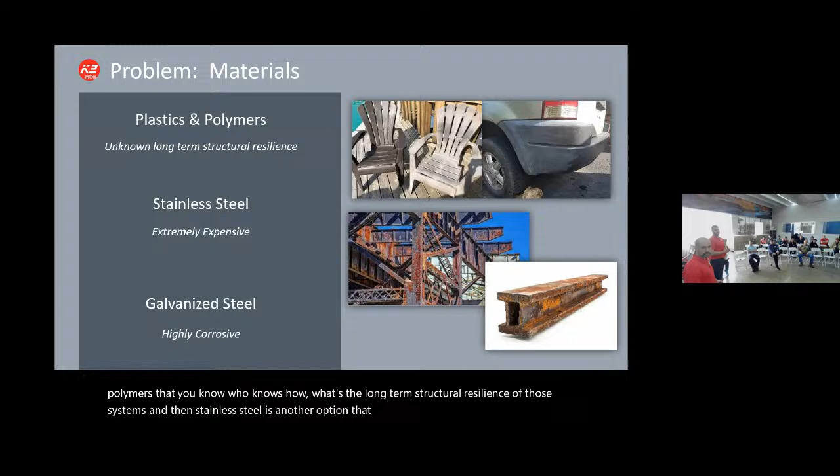So how we've addressed that is by using ZAM steel. ZAM is a zinc aluminum magnesium coating—it's kind of an in-between between stainless and galvanized. Galvanized you see a lot in ballasted systems or ground mount systems, but with galvanization you can still see some corrosion and rusting on the materials. With ZAM, to eliminate that corrosion and rusting, it's like a thin film coating that covers any cut or exposed edges of the steel and acts as a coating that resists corrosion and rust. ZAM is used in multiple industries—we're not the first ones to come up with it, but it's a great in-between between stainless and galvanized.

And then the obvious problem is roof damage. So what causes that? Wind vibration, seismic activity, thermal expansion and contraction of the materials. So there are limits on how big the array sizes can be before you have to have those thermal breaks.

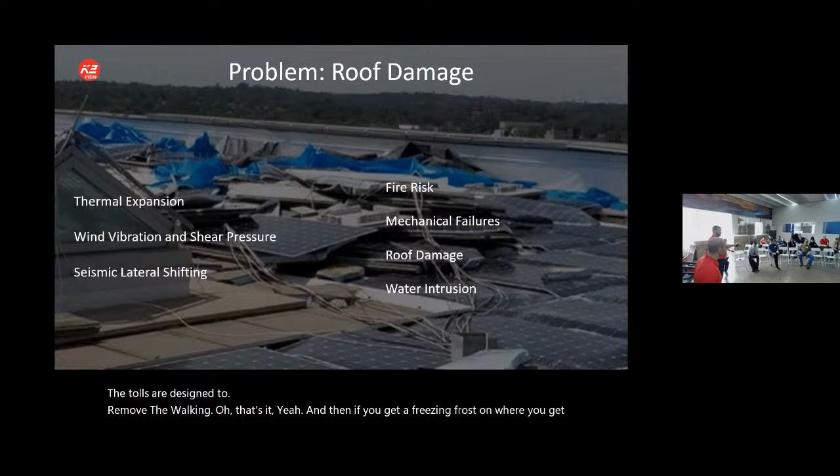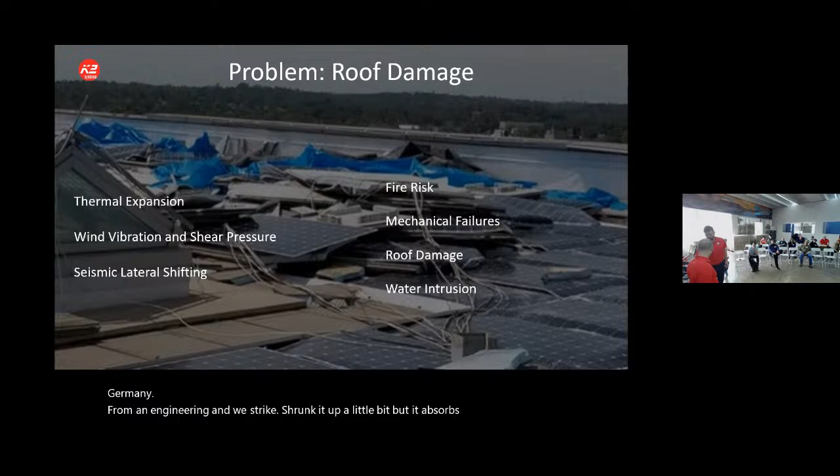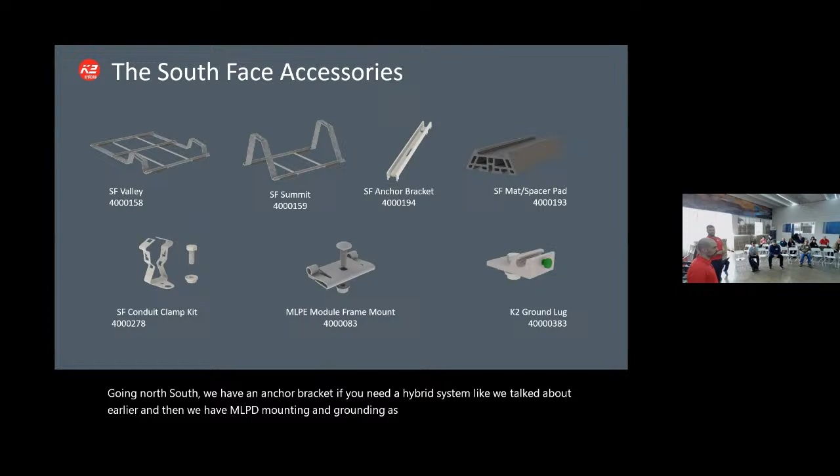It's a two-part number design, but we have accessories if needed. We have conduit clamps to run any raceways east-west. You can install wire tray or cable trays going north-south. We have an anchor bracket if you need a hybrid system, like we talked about earlier. And we have MLPE mounting and grounding as well. These are all concerns you want to address when designing one of these ballasted systems.

So again, tools, we talked about this earlier. We have tools available to everybody. They just require a login to save your designs and download the BOMs you're going to need. The idea with our K2 quote tool is that you can do it in a minute or less. That was the whole idea. You're on your cell phone, a smart tablet, or your laptop.

It's really quick, super intuitive. We've got images of what rooftop, what type of mount you're going to use. It's got your modules already preset, but if you need custom ones, we allow that as well. You can drag and drop the rooftop right onto the image. If you want to get into the weeds, we have an engineering page that lets you select more project details. But within the K2 quote tool, it's a quick one-minute-or-less BOM tool, and that's available to you.

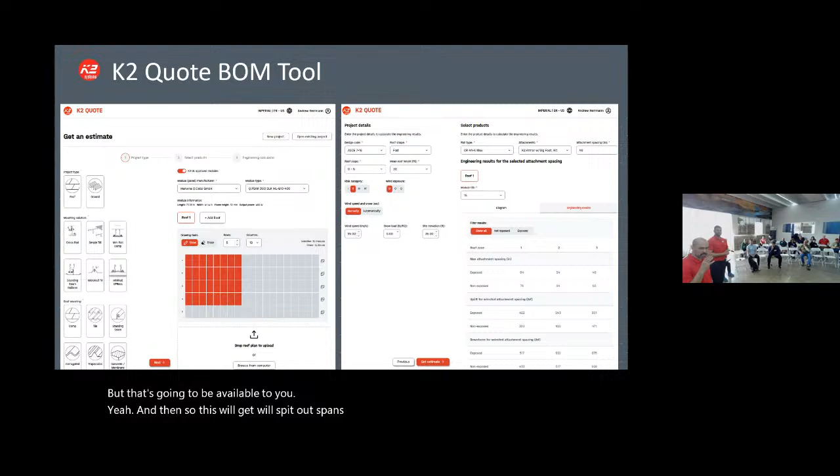This will spit out spans. It does have some engineering in the background, but it's mainly just a BOM, bill of materials, tool.

Lastly, we have our K2 base tool, which gives a full structural engineering analysis. The K2 quote tool could design our flush mount systems, simple tilt systems, but for a ballasted system you'd want to use K2 base to get the specific loads you need to see, or average PSFs you need to hit or stay under. It gives a full layout of how to lay out the chassis, the dimensions, the spans between chassis, depending on the module input you put into the system.

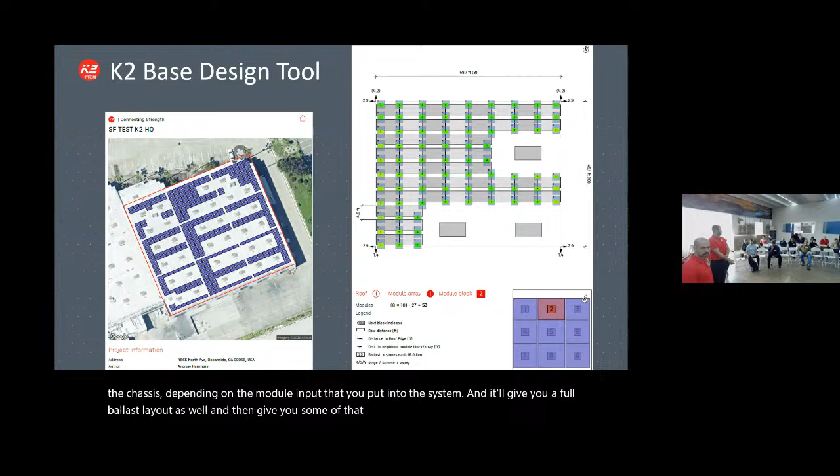It'll give you a full ballast layout as well, with PSF data, color coded. It's a highly technical tool, built from an engineering perspective first, and a BOM second. So we offer training on this tool because you probably want some time for us to walk you through it, and we can also help design the system. But we do give you full access to it.

Does anybody use either of these tools? Yep. You just create a login and save projects.

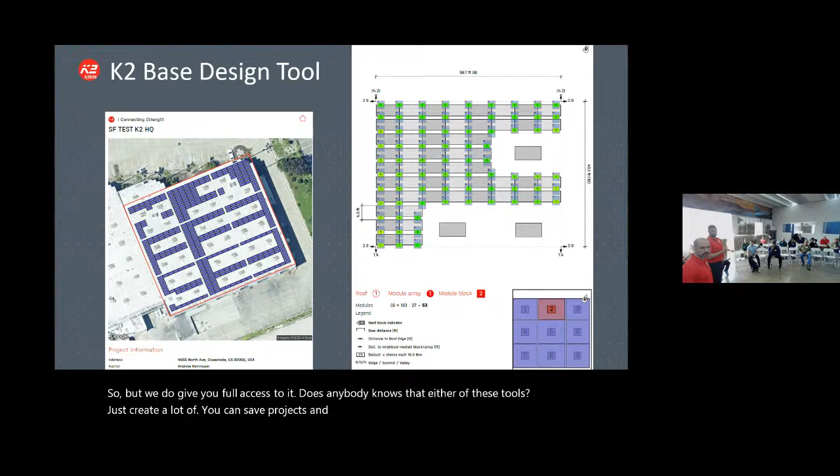We're back. Yeah, and that is it, I think. That's the end of it. Well, I guess we're open for any questions. Back and forth. Thanks for that.